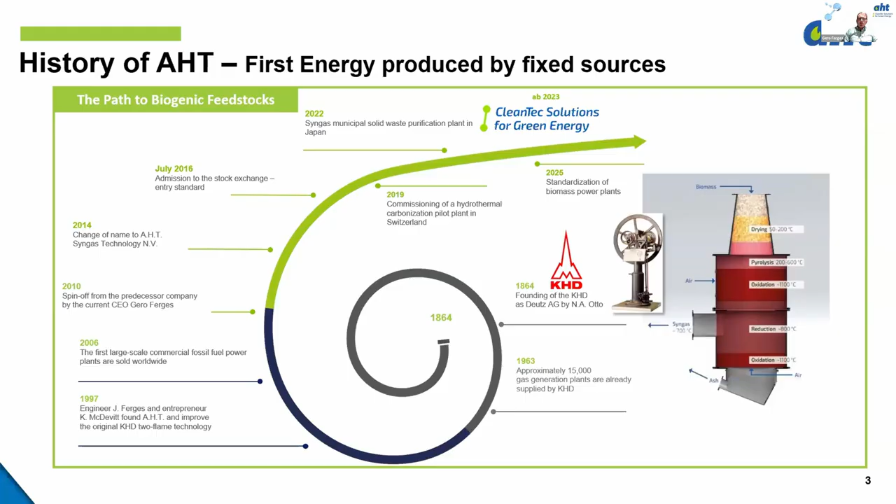So I took over this business from my father. We are listed at the Frankfurt Stock Exchange, to make it short, and now we are continuing our growth path, and we are continuing to build up our company, and we do it with our different products and with our different value chains.

So what do we do? We convert fixed biomass and residues and waste into a syngas. And how do we do it? We have a double fire gasification process. I will explain it later. So at high temperatures, we convert our input material into a synthetic gas. A synthetic gas consists of carbon monoxide, hydrogen, and methane. So it's a burnable gas, and nowadays you call it green molecules as well. That is what we are producing with our high temperature process.

And we use wood, biomass, waste RDF, so waste fuel, biochar or sewage sludge, and many other components to convert it at high temperature into our products, which can be synthetic gas, which can be used in a boiler. We can, as a byproduct, produce biochar. As I said, we are converting the molecules of the input material into the gaseous form.

Because we do it with a high temperature, we have a very clean and pure gas that we are producing. And this clean and pure gas can then be used, for example, in the CHP, for the production of electricity. We have a byproduct which is heat and cold in this case. And what is becoming more and more interesting are the emission certificates, the greenhouse certificates, which offer additional revenue as well.

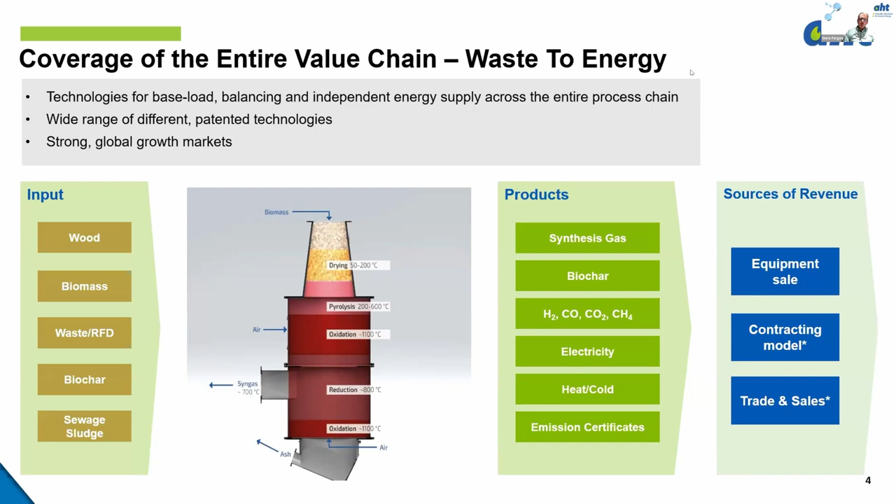So before I go into detail, I want to explain our technology a bit more simplified. I have three, I think, important topics where our technology fits in, and how to describe it. So when you imagine a fire and the flames you see burning, that is the gas which is burning. What we do is not supply enough oxygen for this gas to burn, but we collect it, we suck it from the process, then we cool it down and treat it in order to have these molecules still unoxidized, unburned for further use.

What we additionally do and what is important for us, if you compare our technology, we are not a biogas system. You know, these systems with the green bubble on top of the big vessels. We operate at high temperature and we focus, and that's important for us, on using non-edible feedstock.

So we use all the residues, and I use the example of a sweet corn, a maize plant. So the seeds shall be eaten, and the corn shall be eaten, and the remaining stalk and the leaves are an input fuel we like to use in our systems to convert into a synthetic gas. So that's very important for us, that we don't use food, or sources which are in competition with food.

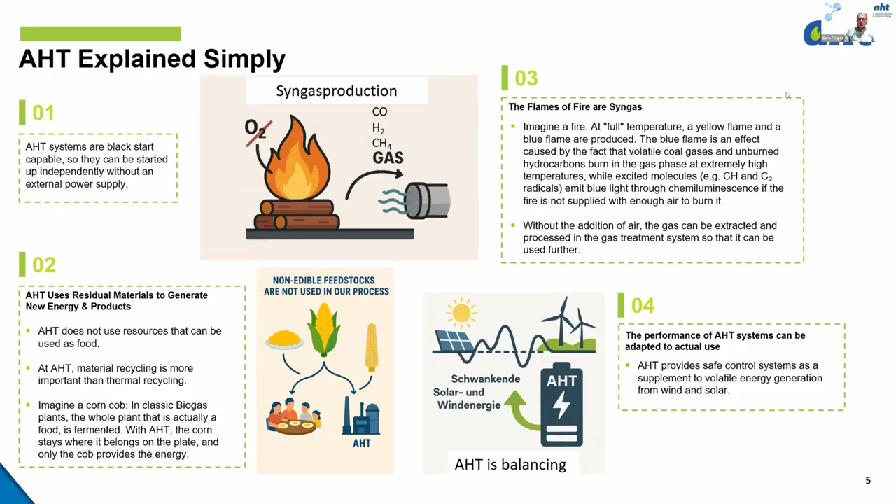This is especially important if you are using waste and waste residues, that we wash the gas before it's further used. We do this with water, and we have a water treatment unit to be able to recycle the water. Later on, we can use the gas in, for example, the CHP to produce electricity and heat. We can already use the gas when it's hot for industrial applications. I will explain this later as well.

If you have a high temperature process in the industry, we can produce and provide a substitute for natural gas, a greenhouse gas free or greenhouse gas negative gas for these industrial processes. All this equipment up front is to use different types of input fuel.

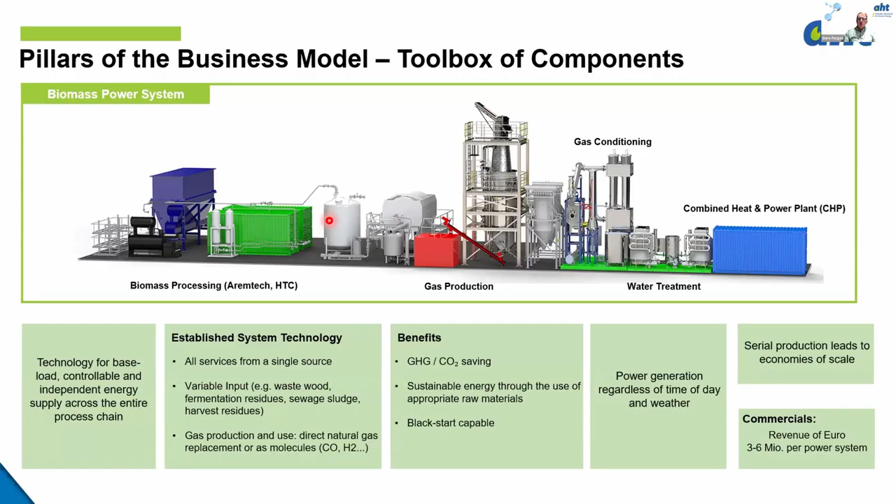So this whole chain shows the components we are offering, which are all standardized for our customers or for our own units. This standardization is important so that we can deliver this equipment for a good price and in a reasonable time for our own projects and for our customers.

Okay, coming to the core of our technology, as I said, the twin fire gasifier, that is the core of everything we are doing. It's called twin fire because it has two zones. We have the so-called downdraft gasification at the top of the process and the updraft gasification from the bottom. So we work top down and bottom up, and that's quite a motto in our company as well, that we always approach from different sides.

The advantage is that when we put in fresh input material, we go through a drying zone and a pyrolysis zone, and this is when you can still have dirty gases, and this is what many competitors have. They still have quite a dirty gas. This is the reason why we put this gas through our hot zone, the oxidation zone, and destroy all impurities and all organic hazardous matter, to convert these long hydrocarbon chains into the molecules carbon monoxide, hydrogen, and methane. This is what we are doing in the upper part.

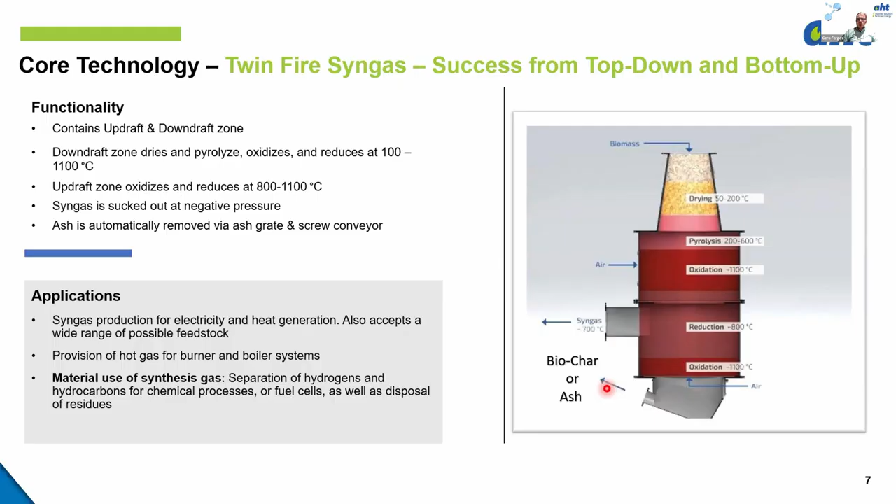So now I make the link to the market. We are unique in medium-size products. There is some competition in the smaller size. There's some competition in the bigger size, but this is really the big competition, like Siemens. In the smaller size, it's more the farmer's application, and we are the medium size, with our plant and our company addressing medium-sized companies and energy users as well.

And in this market, there's a prediction of a growing bioenergy and biomass market. Although it is not a big topic at the moment, it's still a growing and predicted growing market. Together with this, hydrogen and molecules from biogenic input material are expected to grow very fast and very high. So our product to convert biomass into hydrogen, we see a big future in this product, and I'll describe it a bit later. But all these markets where we are working are growing markets and are expected to grow further.

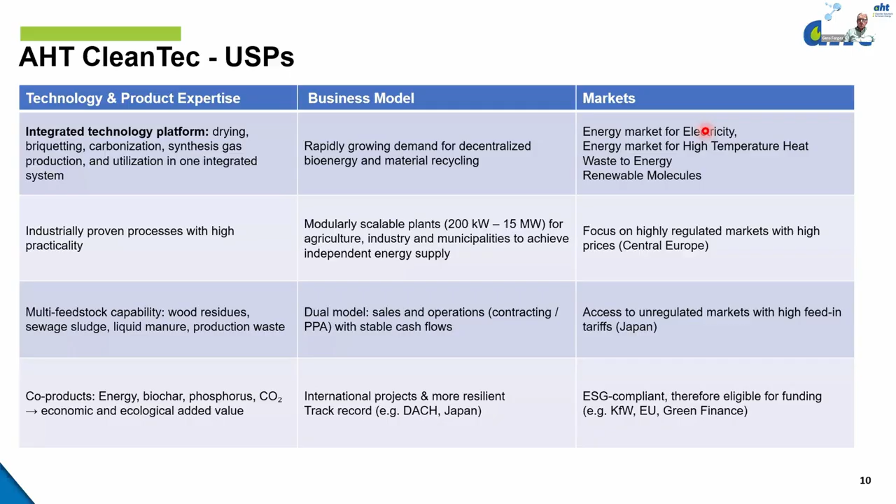We are in growing markets, as I mentioned, in the bioenergy market, but also in the circular economy and renewable molecules. These are all markets we can serve. We have standardized and therefore scalable plants. We have standardized all the modules down to the last screw, and we work with OEM manufacturers. So we can scale the company and products quite fast, because our main focus is on engineering, operation, and programming the software. That was all done in recent years and can now be used to scale. These are the main USPs; I don't want to mention them all in this presentation.

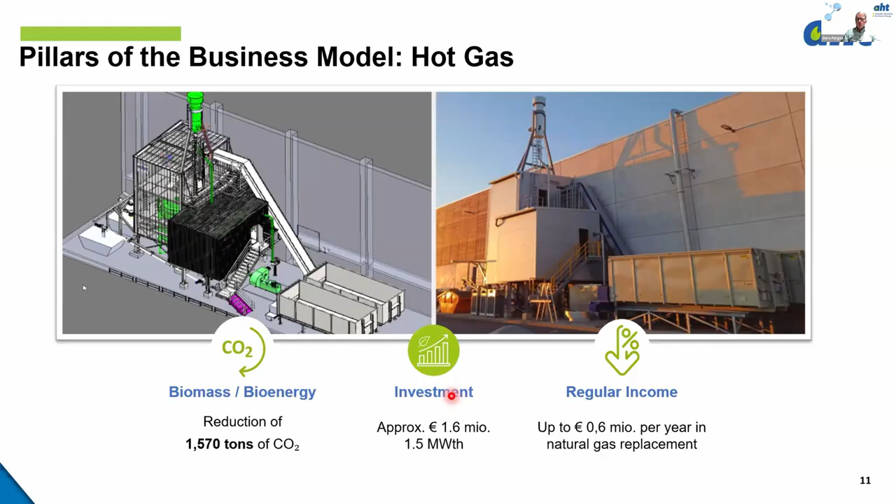free, and this ensured them already further big contracts with their customers, because they were the only company which could prove that they are really a greenhouse gas free production facility. So they save 600,000 in the natural gas. The investment in such a unit is about 1.6 million euro. So a very fast ROI in developed markets. And this is where we see a big potential for the future. This product is what we want to roll out to our customers, specifically in Europe and Germany.

The other main product we are offering is a biomass power plant. Here's an example of a 2 megawatt unit in Japan. As I said, Japan has very high feed-in tariffs, and such a unit will produce about 4 million revenue in electricity per year because of these high feed-in tariffs, with an investment in our equipment of about 8 million euro. So that is why I want to go into the contracting business, into the own operation of our units, because one time business to sell the equipment is a good business, but if over 20 years this system generates a free cash flow of 60 million euro, this is much more interesting than just selling the units.

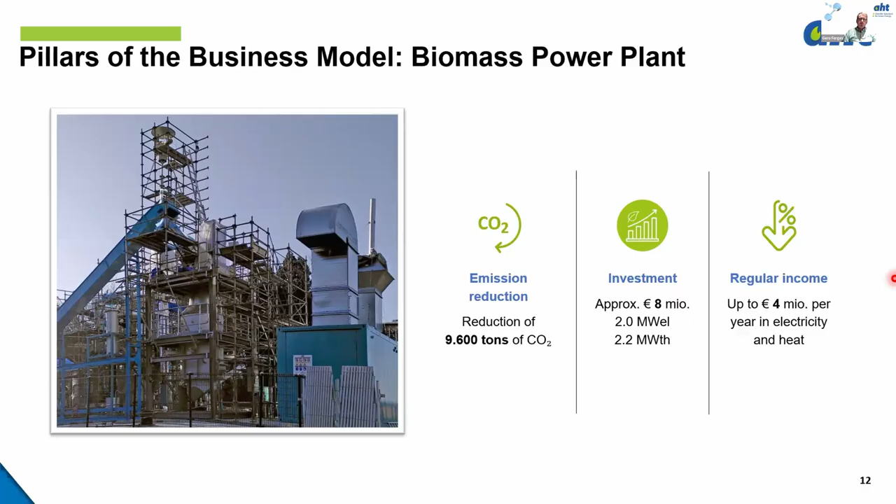However, we will not start in a market like Japan that is too far away. This is what we would like to do in Europe and in front of our door before we go later into the further away countries. This is the outlook, what we have achieved in the past and where we are heading to. So we want to supply our own energy from our own facilities. We have started producing certified biochar as well. That is a byproduct, but as I said, becoming more and more interesting to our customers. And in the future, we have an approved patent for hydrogen

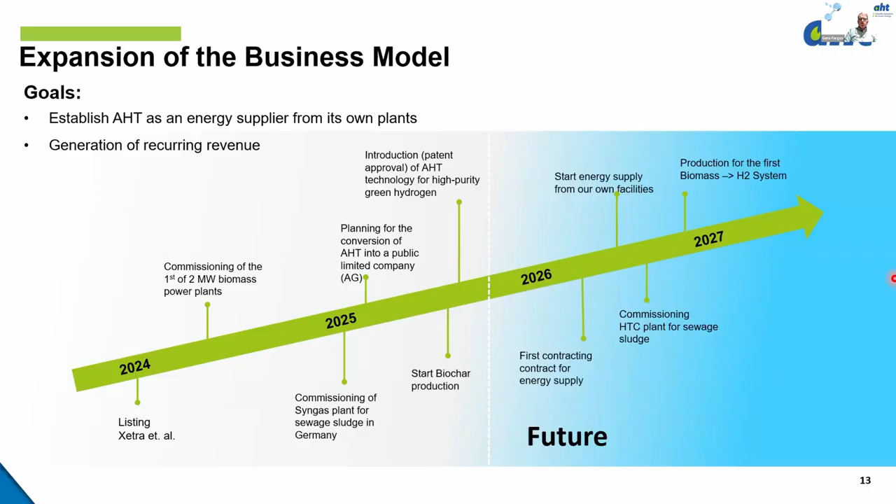from biomass. I'm running out of time, so I will only mention shortly that the production of hydrogen from biomass is another product which is based on our high temperature process again, focusing in this case on the production of hydrogen and carbon dioxide. So we shift the process in the direction that the main focus is on the hydrogen production. We have applied for a patent, and this patent is granted. The political circumstances in Europe are a bit not stable, let's say, or it's not very clear where the direction is going. But this is a product we have prepared in a big due diligence for the future. And once it's more clear where the political direction in the different markets is heading, we are ready to use this as well.

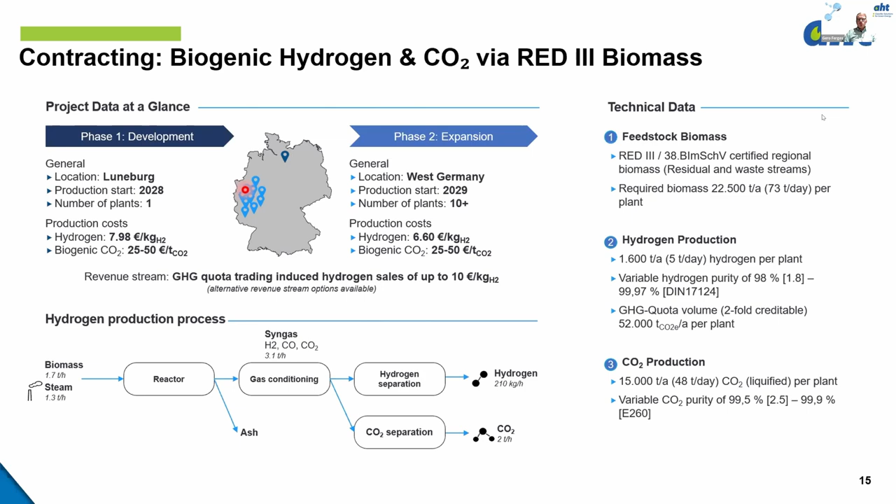A quick overview of our projects. We are focusing in the near future on projects in Austria. Here we have a big project pipeline, and one project is very far developed with a partner of ours, supplying hot gas for industrial applications. And another big market for us is Poland, where we are preparing projects. Yeah, quick overview about the projects.